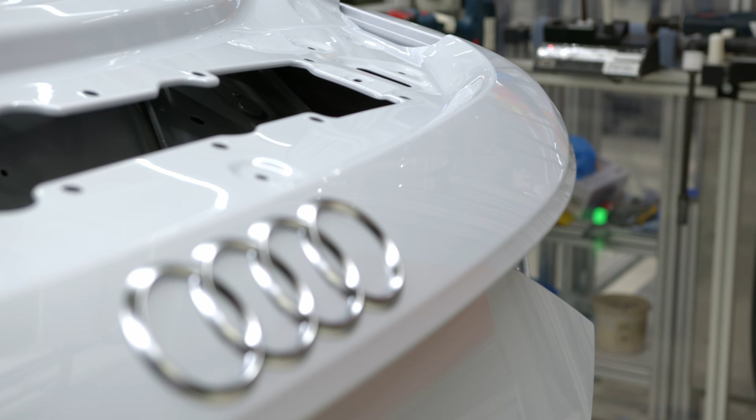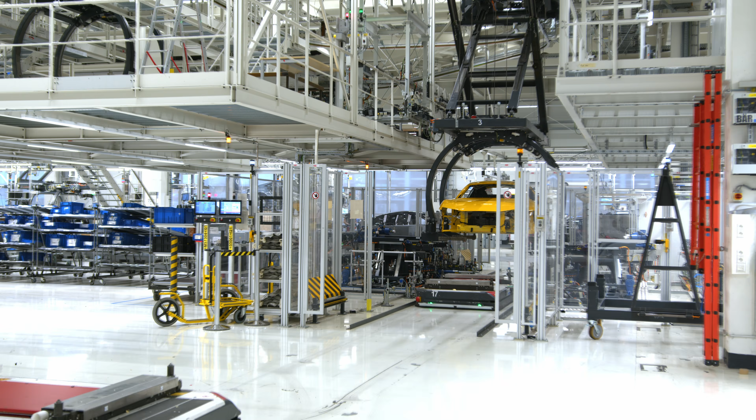The main benefit of using FixtureMate is it's very easy to use. It's very quick to produce fixtures for our factory. My name is Cem Gülaylar and I'm an employee of Audi Sport, and I deploy jigs, fixtures and tools for our factory here in Böllinger Höfe, Heilbronn. We produce here the Audi R8 sports car and the Audi e-tron GT full electric car.

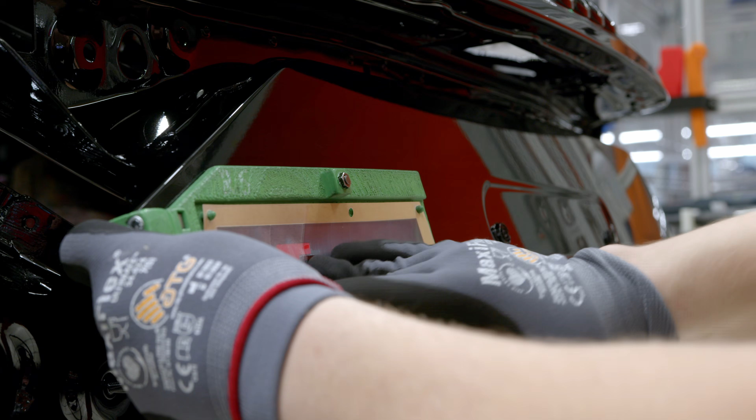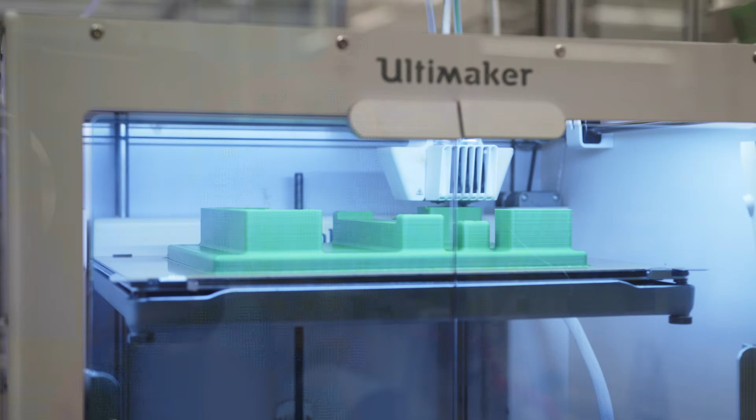In 2012 we began with 3D printing, and we began with small hand tools to assemble the cars and make the working life for the workers better. We produce nearly 800 tools and jigs and fixtures for our factory here. Outsourcing needs more than 2, 3, 4 weeks or a month, depending on the supplier and the process to bring the order to the supplier.

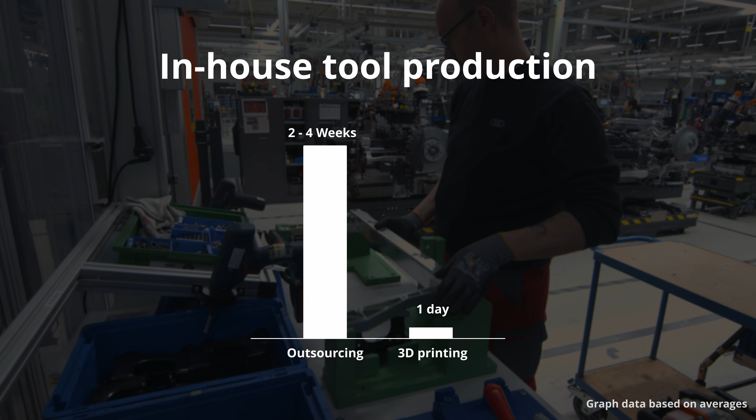3D printing helps us to get these tools in a very short time. The worker comes to us and says, I need a fixture to assemble the cars. It takes 1 day to get this tool in his hand. Normally when we make classic CAD constructions, we need a lot of time to make this tool in the CAD software. We started in 2019 with FixtureMate in our factory.

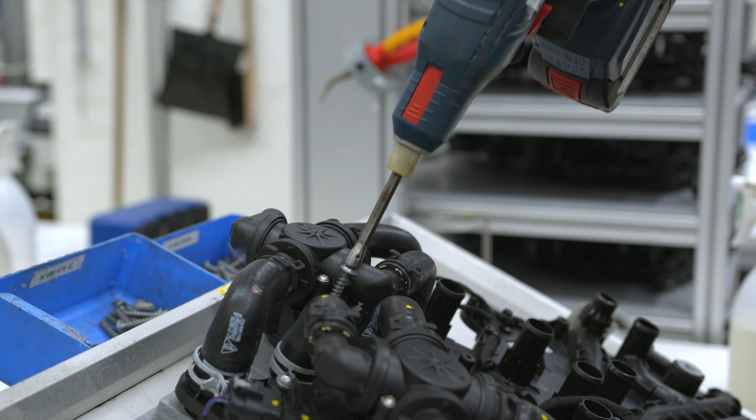We started to produce the Audi e-tron GT full electric car here. We need nearly 200 fixtures and tools for this new car. And FixtureMate helped us in a short time to bring a lot of fixtures. So we put our parts in FixtureMate and bring the fixture out of this software in a very short time, in minutes, 10 minutes, 15, 20 minutes.

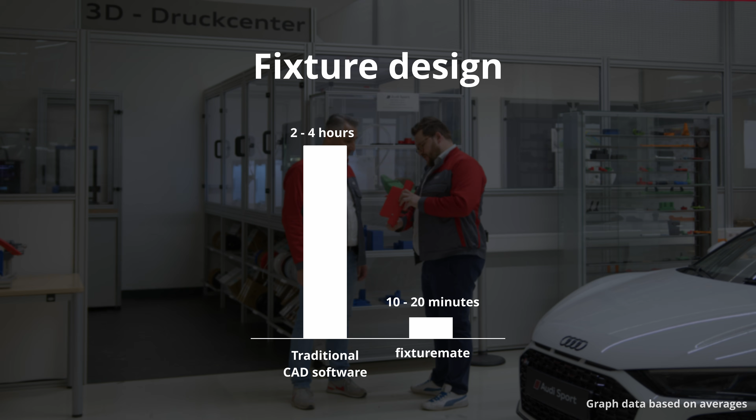And normally in the classic CAD construction we need 2 hours, 3 hours, 4 hours, depending on the size of the part. FixtureMate is very easy to use, so we can bring trainees and show them how to use the FixtureMate software, and they can directly work with this software and bring the fixtures in a short time.

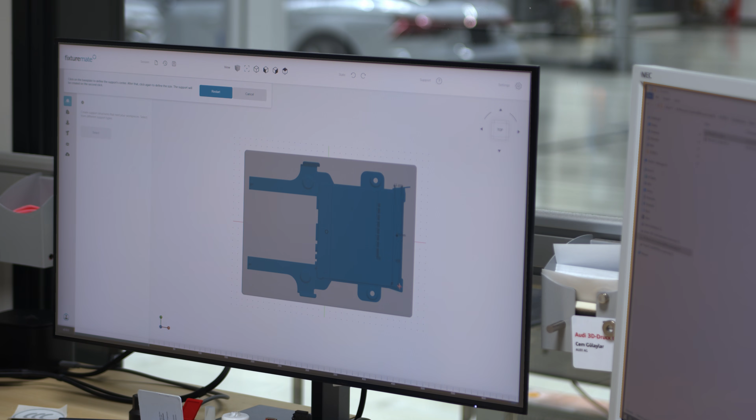The workflow from FixtureMate is very easy. Put the part in, make the base plate, and we choose the supports we need for holding the part in. And after we have made the supports, we subtract the piece from the fixture itself. After that we make the name tags. If we want, we can put clamps also on the fixture.

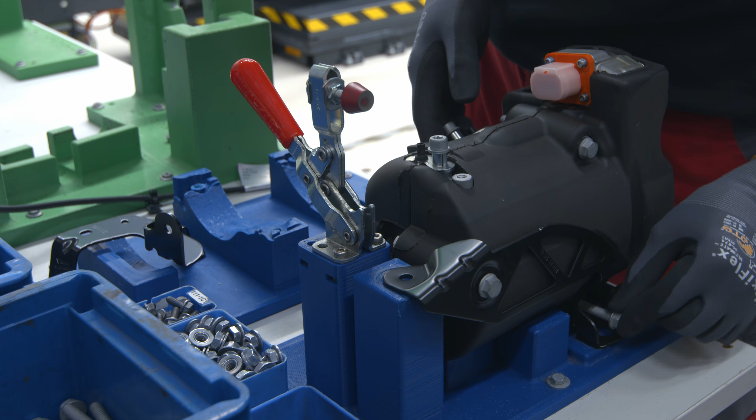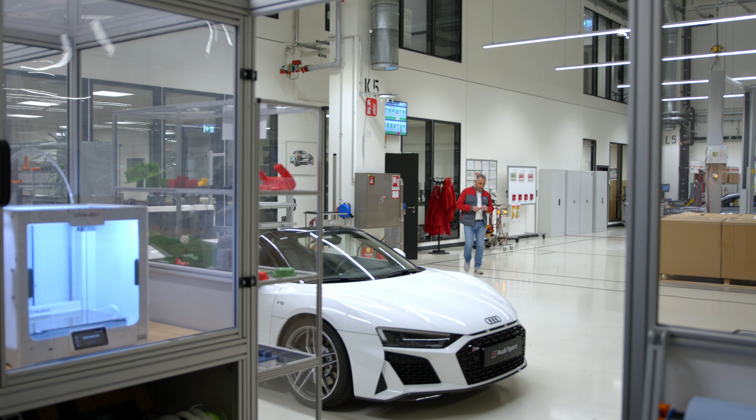Then we can export it, bring it to Cura, and I give the parameters in the software, the layer thickness, the infill, and after that directly print in a very short time. Like I said, maybe in 20 or 30 minutes.

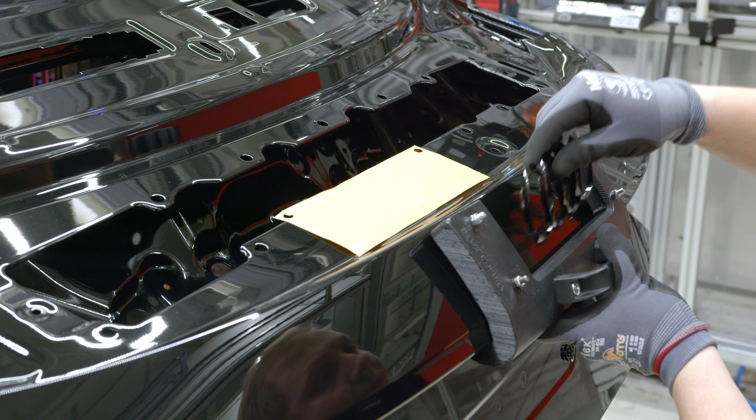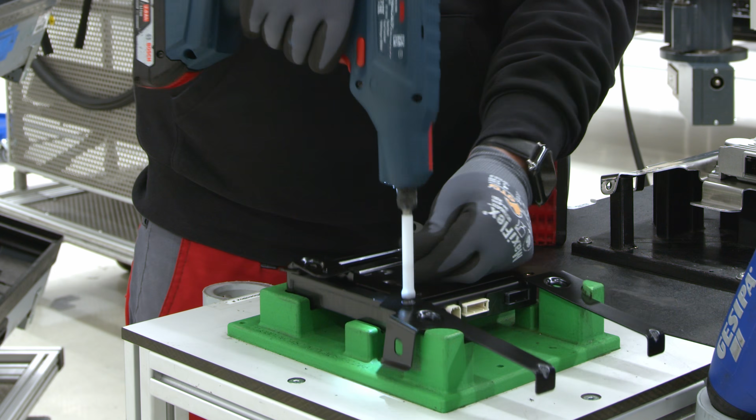We use tough PLA because it's cheap, it's easy to use, and TPU. We use TPU mostly for protection, to protect the car parts themselves, and we also use ESD safe materials and sometimes ABS or PETG. 3D printing is for us a very fast and helpful thing for our factory and for our workers.

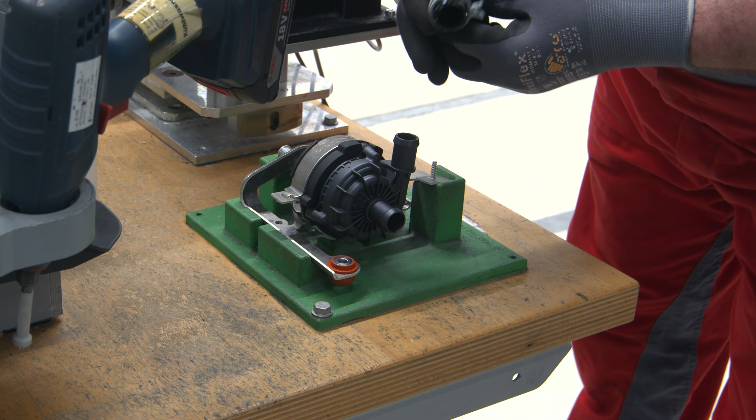The main thing in FixtureMate is it helps us a lot in times when we need a lot of fixtures in a short time. So I have time for the real challenges, yes.